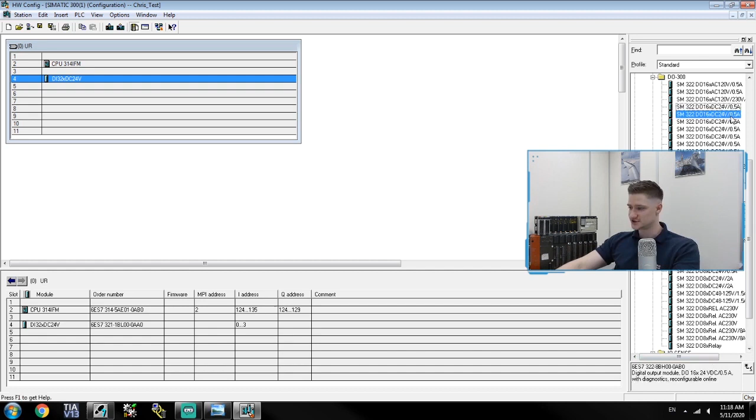And then do the same for our output card. So our output card is DO16, DC 24 volt. So just go to your DO folder, and you want DO16 24 volt, and there's actually quite a few of these ones. So we've got quite a few available here. Again, looking at the product code will tell us which one we want.

So we want the 1BH01 0AA0. So that there is 1BH01. Not that one. Not that one. Not that one. There we go. 1BH01 0AA0. Drag and drop that into position.

And then the final card is our analog card. Our analog output 4-way 12-bit. So just close down DO. Go to your analog output folder. And we're looking for analog output 4, 12-bit, and again there's 2 of them, so all we need to do, just scroll down to the bottom, 5HD01 0AB0, go to your hardware catalog, and not that one, but that one there.

And there we go, that there is our chassis configured, our rack or rail configured. Just save our project here. There we go. Now if we just click on this rail, again, all of your addressing appears down here. So if we look here, our input addressing starts with 0 and ends at 3. Our output addressing starts at 4 and ends in 5. And then our analog addressing starts with 288 and ends in 295.

One way is you can right click this, go to Object Properties, go to Properties, and then select MPI. Another way to do it is double clicking the actual square here, and it brings us straight to that MPI interface. And then all we want to do is we want to select our network that we're on, an MPI network, and then just select OK. And that there will now connect our CPU to our rail.

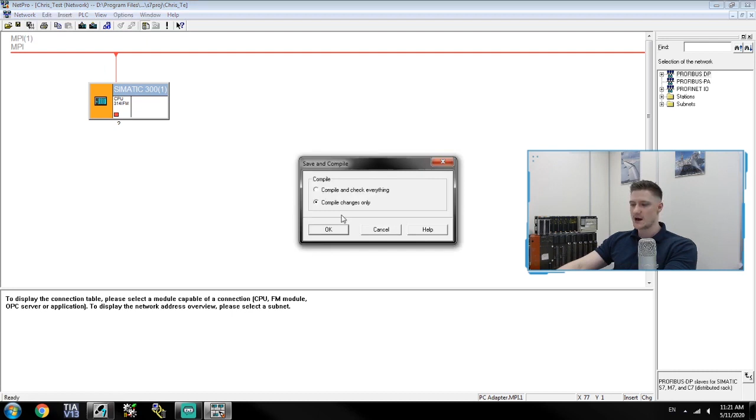Now what we want to do is we want to save and compile this project. So save and compile on NetPro, because we're finished with this. So click the floppy disk with the 1s and 0s, and that there is your save and compile. And what this is going to do is I want this to compile and check everything. Say OK to that. No errors, which means everything's hunky-dory.

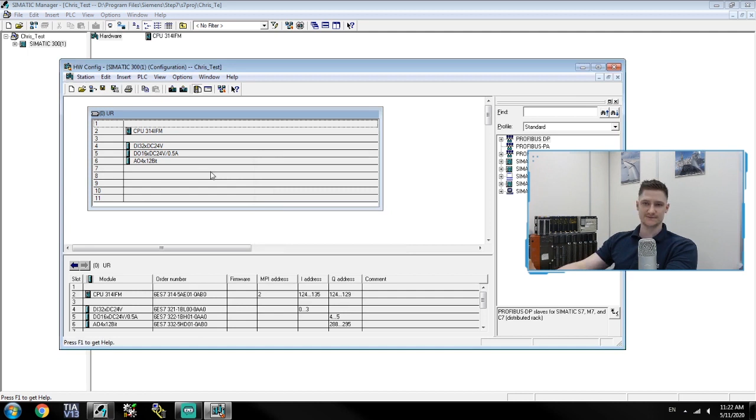Close down our NetPro window, and now select your Simatic 300 and select hardware. And now what we want to do is save and compile our hardware as well. So save and compile that. No errors popped up, so we're all okay there.

Next is to download the project to the PLC. To do this, we just select this download to module icon. Before I do this though, I want to make sure that my communications are set up correctly. Minimize your hardware configuration, go to your options window in Simatic Manager and go to set PG to PC interface.

And when you do this, all the different types of interfaces pop up here. The interface that we're using is our PC adapter MPI, but you've got quite a few different ones available to you. Alright. All we want to do here though is select PC adapter MPI, there we go, and go to properties.

Now, a lot of the times you can just leave this as default, but if you want to tweak it, you can do from here. So if you want to tweak the transmission rate or anything like that, you can do that from here. Just select OK. Close that down. Go back to my hardware properties and then just select download to module.

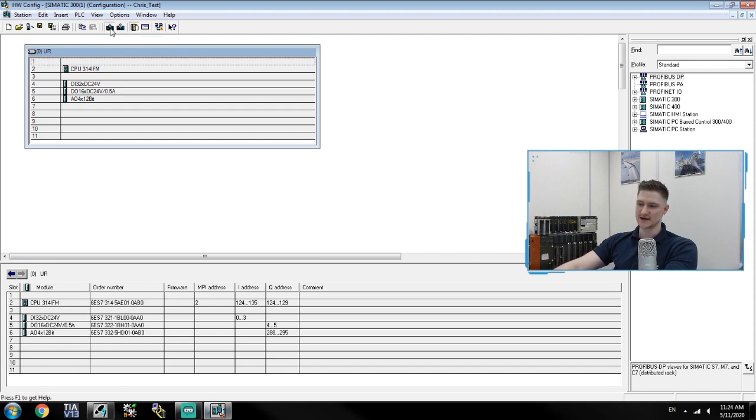It's going to ask you which module do you want to download to, and because the 314 is our only one that's connected, that's the one I want to connect to. Select OK. And then it's going to ask you to search for accessible nodes. So select view, and you should see the accessible node appear down here, and there it is. Just make sure that's highlighted and then select OK. And it's going to start downloading to the PLC.

Now the first thing it's going to ask you is the following modules will be stopped for loading of the system data. Select OK. Now remember, just like other PLCs, when you do a full download, it's going to stop the PLC from running. So all we want to do here is make sure that the process is stopped. For safety's sake, place it in the E-stop, and then select OK.

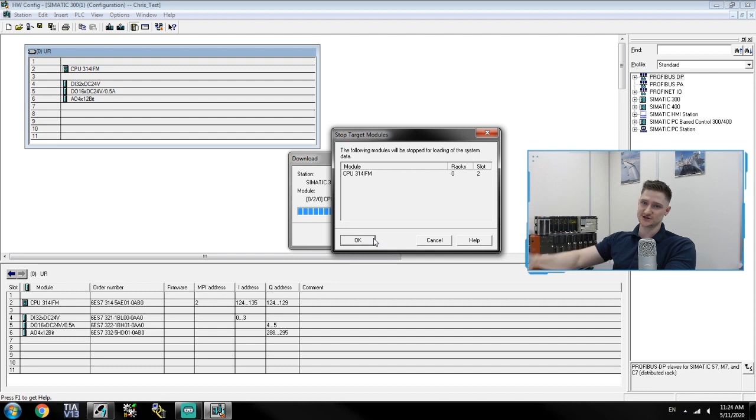This is then going to drop the PLC out of run mode into stop mode. And now it's asking you, do you want to do a restart and start the actual module again? Just select yes there, and there we go. That there is our hardware setup configured.

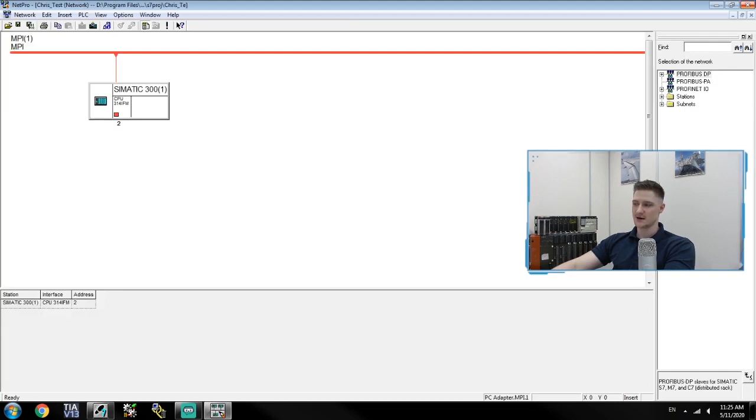So just to recap, we first of all opened up our project, opened up MPI, opened up your stations, dragged and dropped the station into place. We then went to our SIMATIC 300, opened up the hardware, and then configured the rack from what we are using on our board here. Then we just linked up the actual station to the MPI, compiled that, and then downloaded it to the PLC via the hardware window once again.

Okay, that there is setting up the actual project. So it's slightly different to how we did it in TIA. In TIA, all we did is we said, right, just let's upload this. But because it's a little bit more involved here, I wanted to go through each step and show you how to set up a hardware configuration inside of Step 7.

All we want to do now is we want to create a program. So open up your folder all the way down to the last rung, and you should see a folder called blocks, and by default there is your OB1 created.

Any Star Wars fans, remember this is your Obi-Wan Kenobi, the main guy.

Double click OB1 and it'll ask you to create the block. It might say, do you want to give it a symbolic name or anything like that? Not interested in that. All I want to do though is I want to change the created in language to ladder, not STL. Select ladder and then select OK.

And now it's going to open up another window, and this is going to be your OB1 program. We're going to create a very basic program just using contacts and coils and another timer again to show you the timers as well. Now, just a little bit of an overview. At the top here, you have your block interface where you can create internal tags to the block. I'm not going to use any internal tags to this block, so I'm just going to minimize that all the way. All I did there was just dragged and dropped it right to the top.

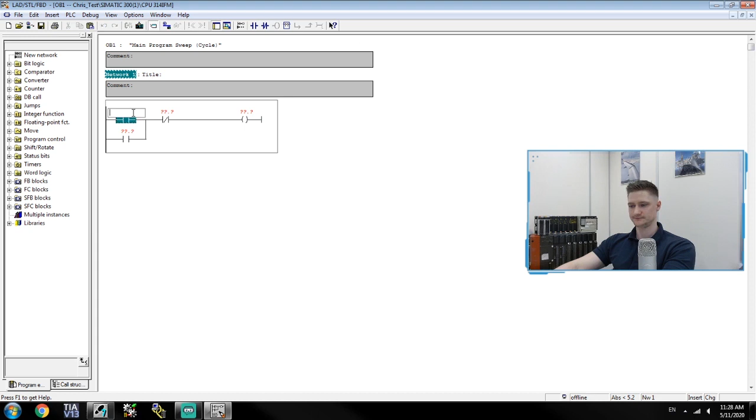Let's give this an address. I'm not going to use an input, I'm going to use an M bit. This will just allow me to toggle it. So I'm going to use the very first M bit, M0.0. And then for the next one, I'm going to use M0.1. This is just going to allow me to toggle the bit instead of creating a force on this. And for my output, I'm going to use M10.0. And this is going to be my run signal. M10.0. There we go.

Let's give these names or symbols. Again, there's two ways to do this. You can either double click inside of the blank space inside of this network, and this opens up your edit symbols for that network. You can also right click and say edit symbols. Or you can go to options, symbol table, and this gives you the whole symbol table for the entire project or for this entire block. I'm going to just open it up from this network, and there's my addresses already created for me.

M0.0 is going to be my start PB. M0.1 is going to be my stop PB. And then M10.0 is going to be my process run signal. There we go. And there's a little tag icon here, and what this does is it allows you to invert the addressing style. So you can have the label at the bottom and the address at the top, or the address at the bottom and the label at the top.

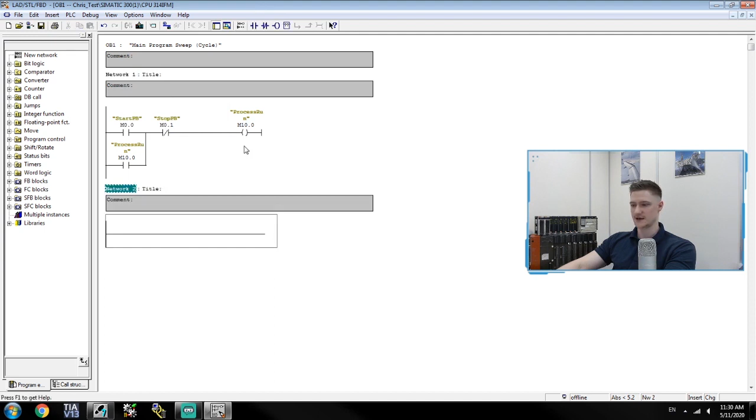And I prefer this style here. So when I go in, I can straight away edit the address from here. If it was similar to this, I would have to delete this entire name and then write in the address. I just like to leave it so the address is directly above the contacts and coils. Now I want to create another network, and to do this just use the new network icon, or you can right click and say insert network. I'll use the new network icon, and add a normally open contact, and that is going to be M10.0, my process run signal.

And now I want to add in a timer, and if I look on the left hand side, you've got your timers folder. If I expand timers, here are all of the timers inside of Step 7. There's a lot more than there was inside of TIA, and a hell of a lot more than inside of RSLogix 5000. You've got the S_PULSE, the S_PEXT, the S_ODT, S_ODTS, and S_OFFDT. You've also got the same versions of those timers. However, these are the S7 style timers.

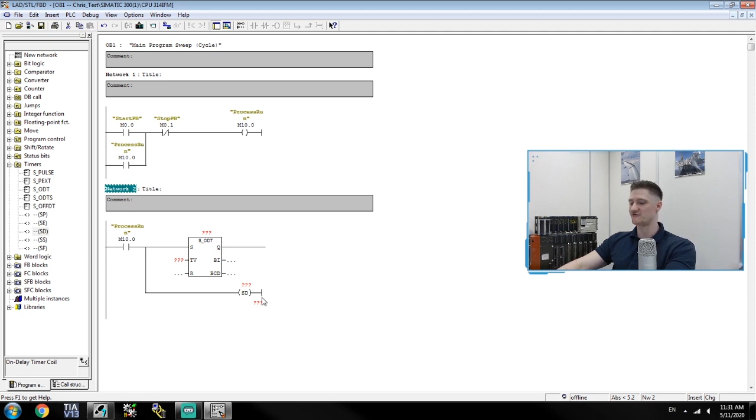The difference between the two is one is a block format, the other is a coil format, like so. And that is exactly the same timer, works in exactly the same way. However, one is a block format, the other is a coil format. We're just going to stick with the block format. I prefer the block format for two reasons. One, everything is neatly placed in one area.

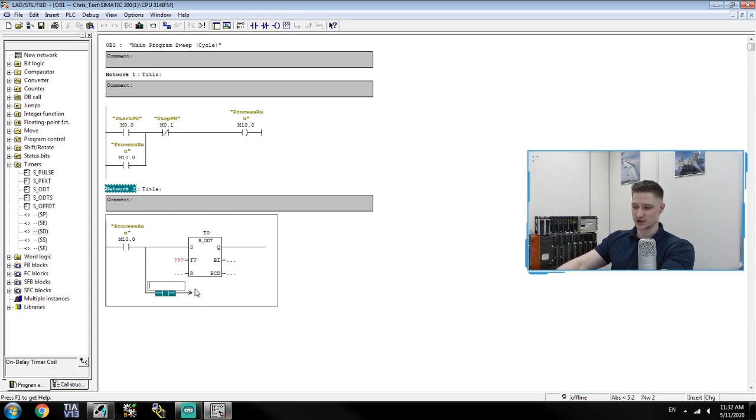I can then tie an output coil after this, and I can also do a contact addressed to the timer. So when I give this timer a name, let's say T0, I can place a contact addressed to T0, and that will turn on exactly the same way it does with the SD. But if I don't want to do that, I can simply just place the coil after this.

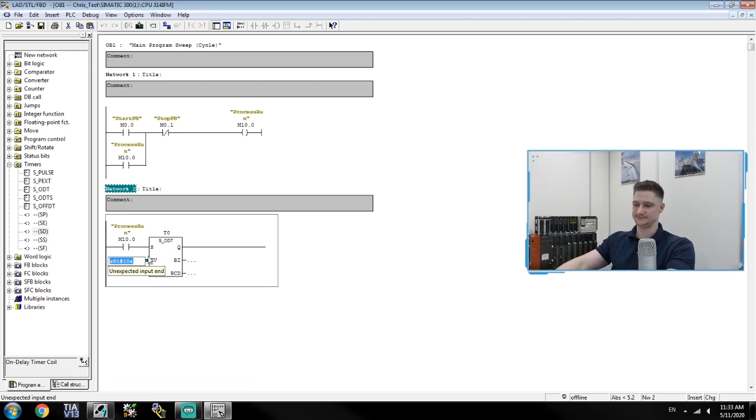What I want to do is have this run signal control this timer for 10 seconds. Now, if I just type in 10S and press enter, it says unexpected input end, it doesn't accept it. You can't just type in 10S like we did with TIA Portal. You have to use the Siemens timer code, and that is S5T#10S. And there we go. That allows us to use our timer value for this timer as 10 seconds.

Now what I want to do is add an output coil, and I want to tie this output coil to my actual output on the PLC, Q4.0, and then we'll just edit the symbols and call this lamp.

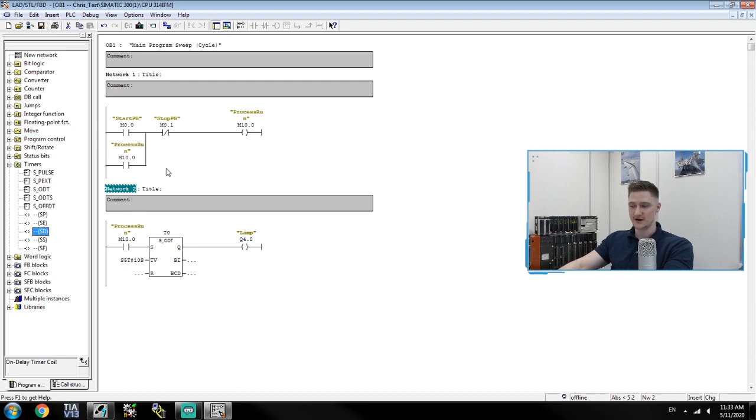That there is exactly the same design as the SD. The only difference is the SD is a coil. In fact, to show you this, I'll create another network, again using M10.0, and this time using the SD. I'll give this T1, and again S5T#10S, there we go.

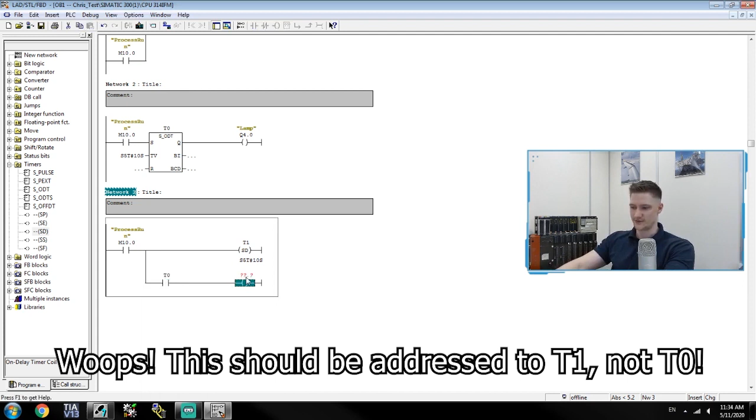Now if I want to address this to an output coil like we did up here, I've got to create another rung, and add a contact, and this contact is going to be T1, and I'm going to use another output coil from there, and I'll just use Q4.1, and call this lamp 1.

So here we've got two networks, exactly the same design. When the process run turns on, the timer's going to run, and then after the 10 seconds it's going to turn on an output coil. The only difference is in network 2, it's a lot more compact and structured. However, with network 3, you've got two rungs to control it and do the same thing.

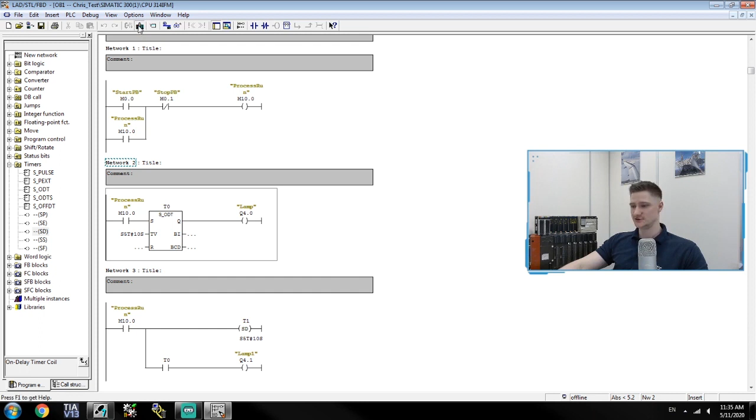What I want to do is just save my project, and then download it to the PLC. I'm going to click download, and it's going to ask, do you want to overwrite the block? I'll just say yes to that. And there we go, that's downloaded to the PLC, and we're ready to go.

If I just click on the glasses here, the monitor icon, this allows us to monitor the program. You'll notice, however, not all networks are being monitored. Only these two networks have. This network hasn't. If I click in this network, there we go, it refreshes itself and allows it to be monitored. There's a few little bugs inside of STEP7 that you'll come across, and these are a couple of them that we've noticed when working with the programmers.

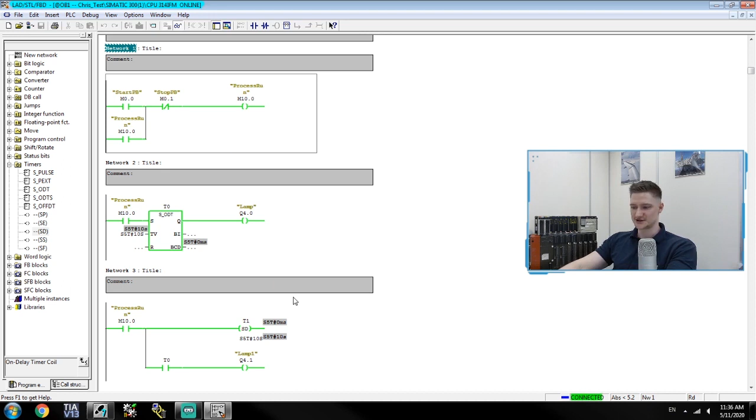Now you'll notice that this is already timed out, everything's been running, and this is because this signal here, M10.0, would have already been latched on previously when I downloaded to this.

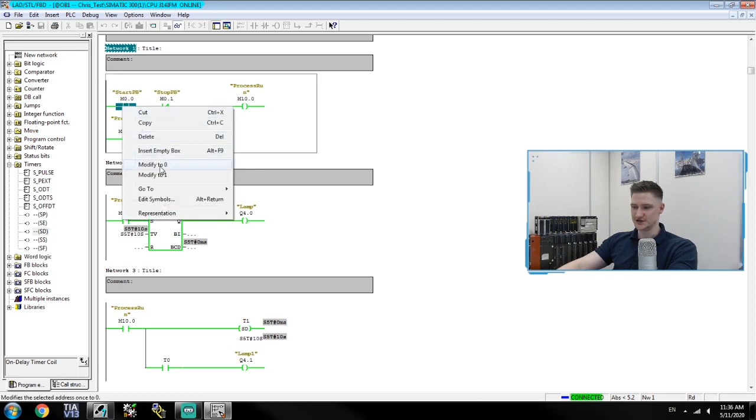If I just modify this to 0, and then modify M0.0, there we go, and modify M10.0. There we go, we're ready to start afresh here. Chances are people who were using this PLC beforehand was using M0.0 or M10.0, more likely M0.0, and that was already latched on inside of the process memory, so when we downloaded to it, it started running the program. All I've done there is reset everything.

So to run this, what I'm going to do here is just right click M0.0 and say modify to 1. What this will then do is close this contact, turn on M10.0 and latch it on. Then what's going to happen is M10.0 is going to turn on from here, run our timer, and run this timer down here. After 10 seconds, it's then going to turn on our lamp.

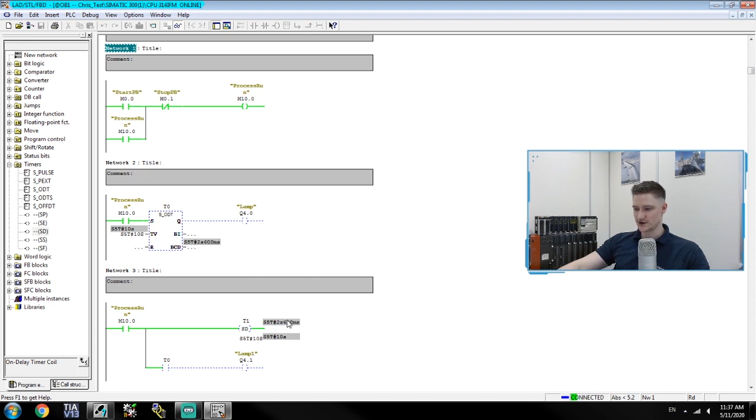So we're going to do this, and you should see it happen. Modify to 1. There we go. Both M10.0s are on, and you can see it's beginning to time out. 3, 2, 1, 0. And there we go. Both timers have now turned on, and both outputs have turned on as well from the actual timers too.

As soon as I disable this latch, so if I modify that to 0 and press our stop push button, M10.0 turns off, and the contacts turn off, and the timers reset, turning off the output coils as well.

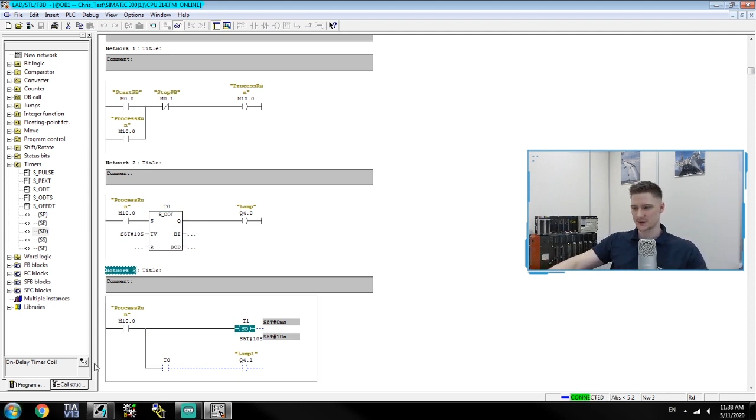And that there was just a very quick introduction to Siemens STEP7, creating hardware configuration, creating a basic program, and then downloading that to the PLC. Hope you guys have enjoyed it, and I look forward to seeing you again.